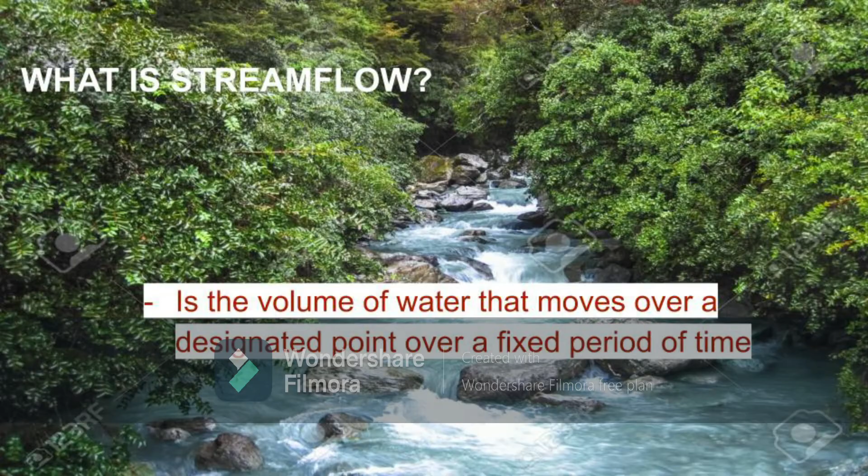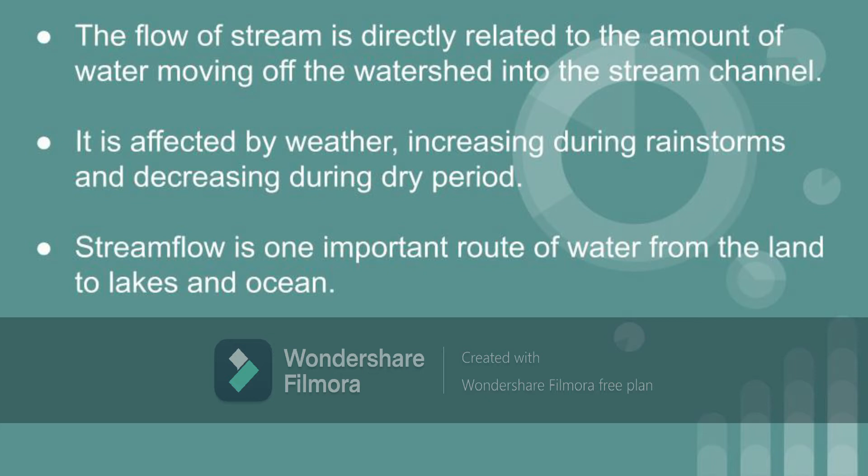The other main routes are surface runoff, the flow of water from the land into nearby watercourses that occurs during precipitation and as a result of irrigation, flow of groundwater into surface waters, and the flow of water from constructed pipes and channels.

Importance of streamflow measurement. Streamflow is of fundamental importance to virtually all environmental monitoring and affects almost all other environmental issues connected with water. The flow of a river changes significantly in a very short amount of time due to plenty of factors. Snow melt from mountainous regions has a major impact on rivers and can cause them to swell past their banks

really quickly. Ice floes are also hazardous, especially when the temperature soars after having been below freezing for a long time. Thunderstorms also produce torrential downpours, which result in flash flooding in many places. This is even more of a hazard because it can significantly increase the water levels in a small river or stream in a matter of minutes.

Streamflow measurements can yield information on changes in discharge that are valuable for predicting flooding, estimating long-term trends in water and sediment discharges, and for distinguishing possible long-term climate change.

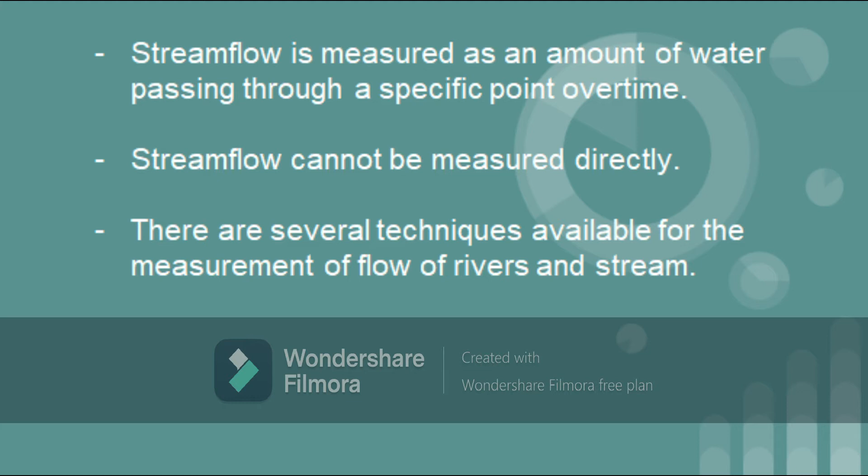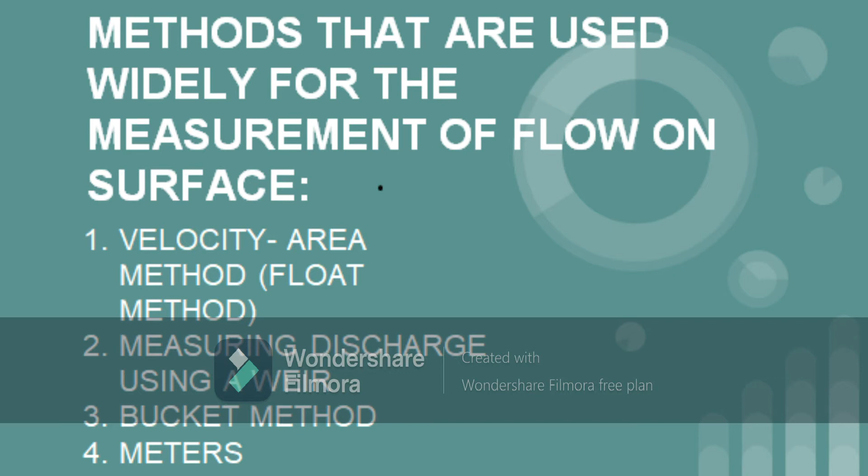Streamflow measurement method. Yung streamflow daw can be measured as an amount of water passing through a specific point over time. We cannot measure directly yung streamflow or river flow. We can measure it by plunging an instrument into the stream or river. There are several methods na usually used to measure the flow. Ano-ano nga ba to? First, velocity area method. Two, measuring discharge using a weir. Number three, bucket method. And yung last, yung meters.

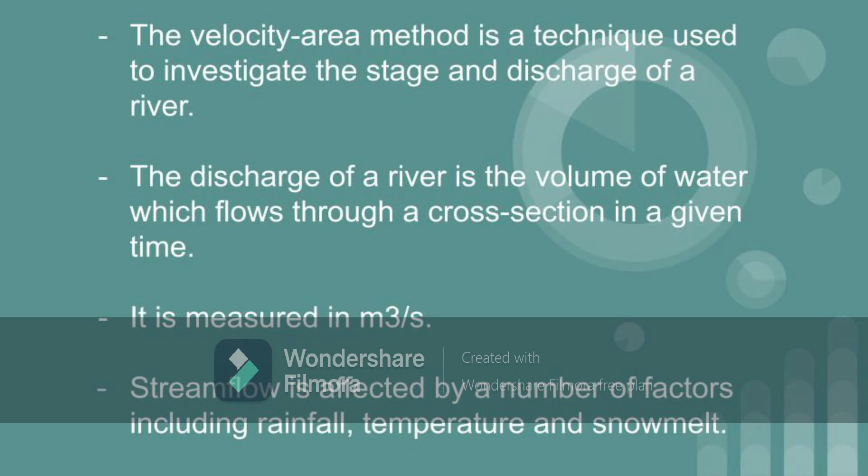Velocity area method. The velocity area method is a technique used to investigate the stage and discharge of a river. The discharge of a river is the volume of water which flows through a cross section in a given time. It is measured in cubic meters per second. Streamflow is affected by a number of factors including rainfall, temperature, and snow melt.

In the velocity area method, discharge is equal to velocity multiplied by cross-sectional area, where discharge is Q, velocity is meters per second or feet per second, and cross-sectional area is in square meters or square feet.

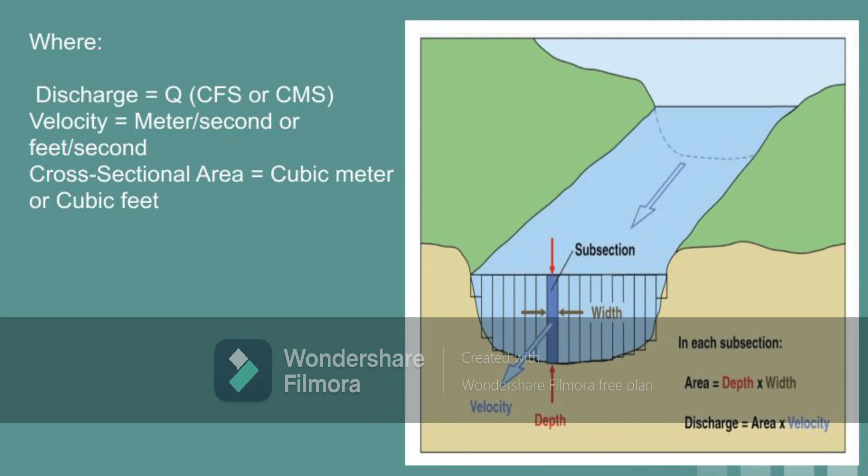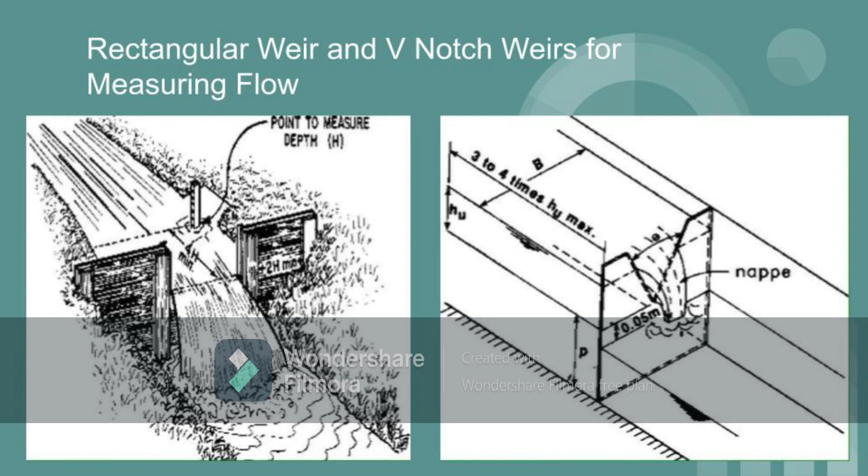Measuring discharge using a weir. Weirs are overflow structures built across open channels to measure the volumetric rate of water flow. We can say that a weir is simply a structure over which water flows in such a way that volumetric flow rate can be calculated. It lets you know how much water is flowing. And also, discharge in small streams can be conveniently measured using a weir.

A weir is a small dam with a spillway, usually made of erosion-resistant materials such as concrete, of a specific shape, or sometimes a weir is simply a thin plate across a flow stream. But weirs can also be broad, thick structures. A thin plate or sharp-crested weir is usually used to measure watersheds, creeks, and small streams. They have also found a use in measuring industrial effluents in the form of weir plates, boxes, and channels.

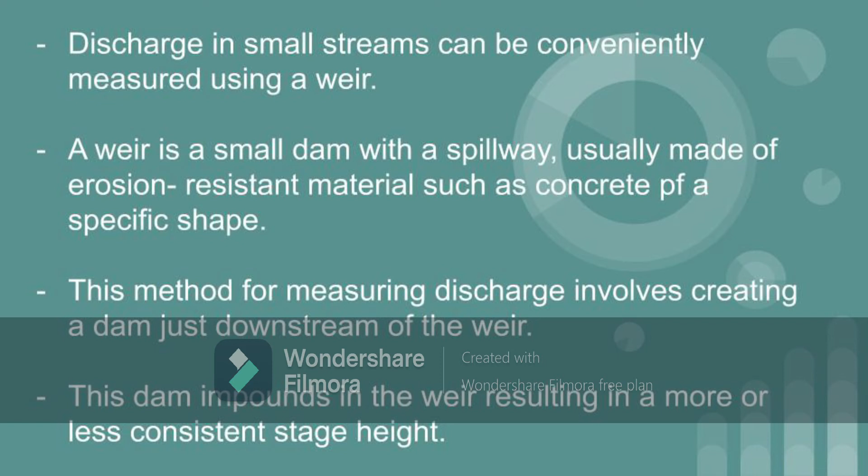This method for measuring discharge involves creating a dam just downstream of the weir. This dam impounds water in the weir, resulting in a more or less consistent stage height. Using the height of water in the weir, one can determine discharge using some empirically derived equations.

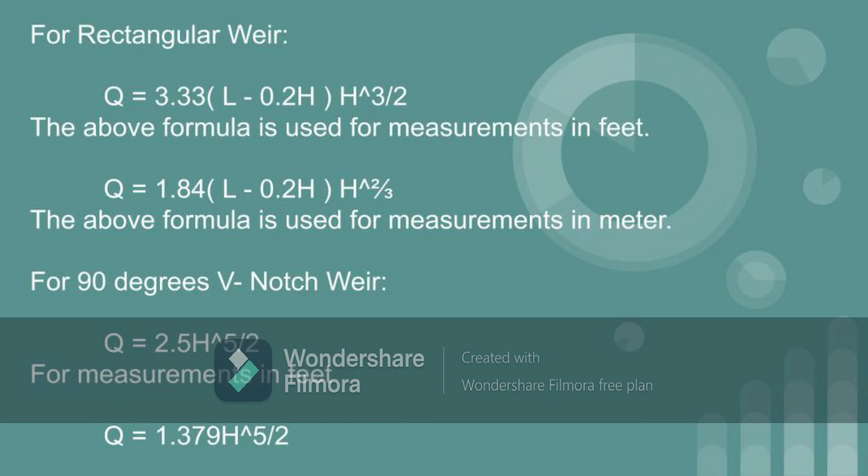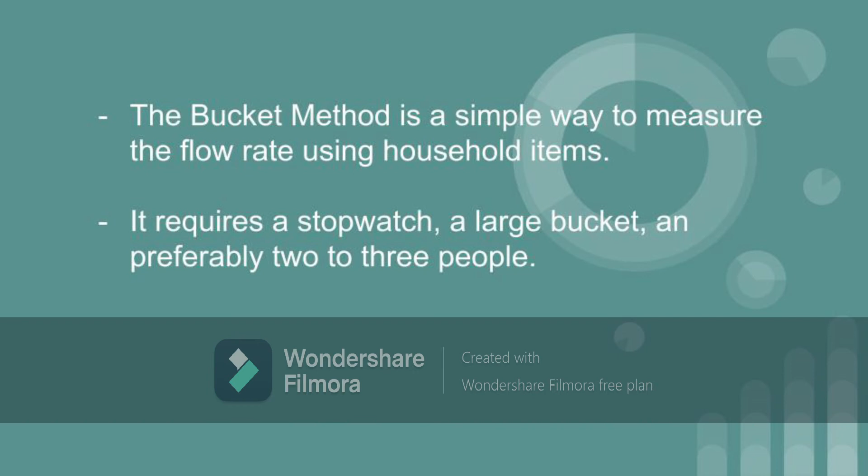Bucket method is a simple way to measure the flow rate using household items. It requires a stopwatch and a large bucket. In measuring the streamflow using the bucket method, the first thing you must do is measure the volume of your bucket and then find a location along the stream that has a waterfall. If none can be found, a waterfall can be constructed.

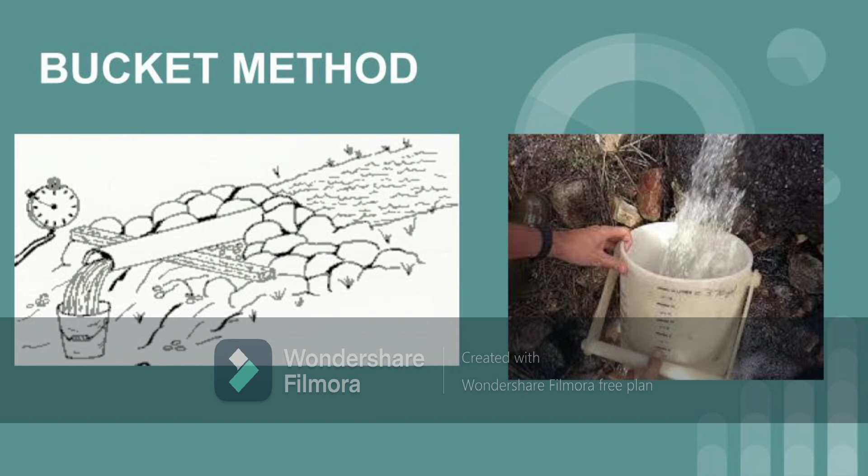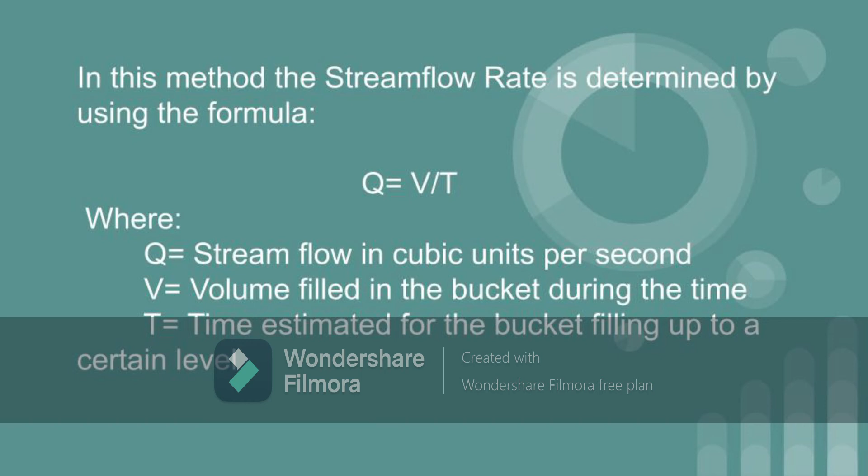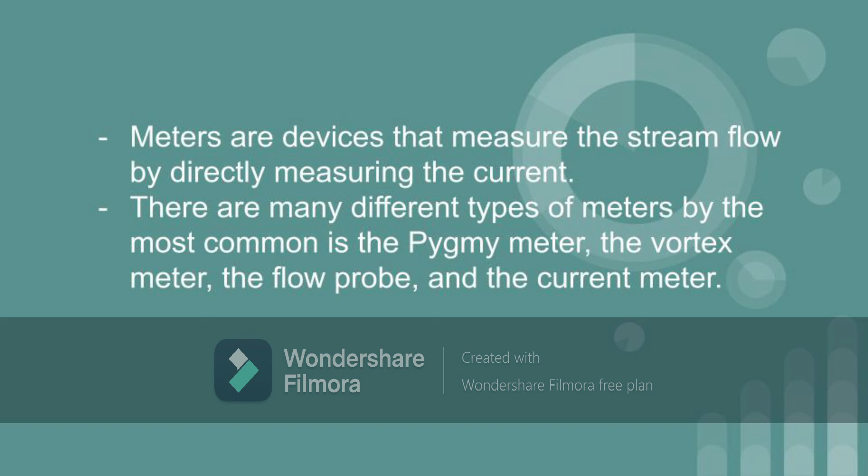Meters are devices that measure the streamflow by directly measuring the current. Tapos, there are many different types of meters. Pero yung mga common ay yung pygmy meter, vortex meter, flow probe, and yung current meter. Where yung pygmy meter ay there's a wheel rotated by the water flow and yung rate ng rotation, yun yung nagsisignify sa water velocity.

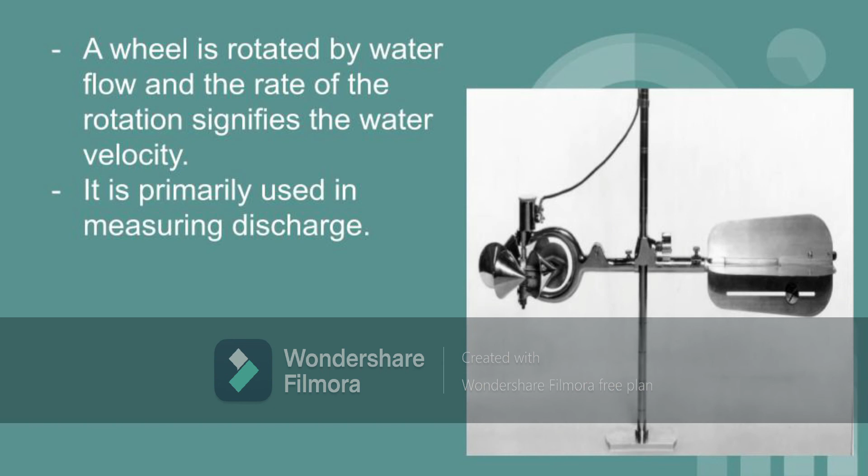And then yung flow probe meter. The Global Water flow probe is a highly accurate water velocity instrument for measuring flows in open channels and partially filled pipes. So, ginagamit siya sa pagme-measure ng flow sa open channels tsaka sa partially filled pipes.